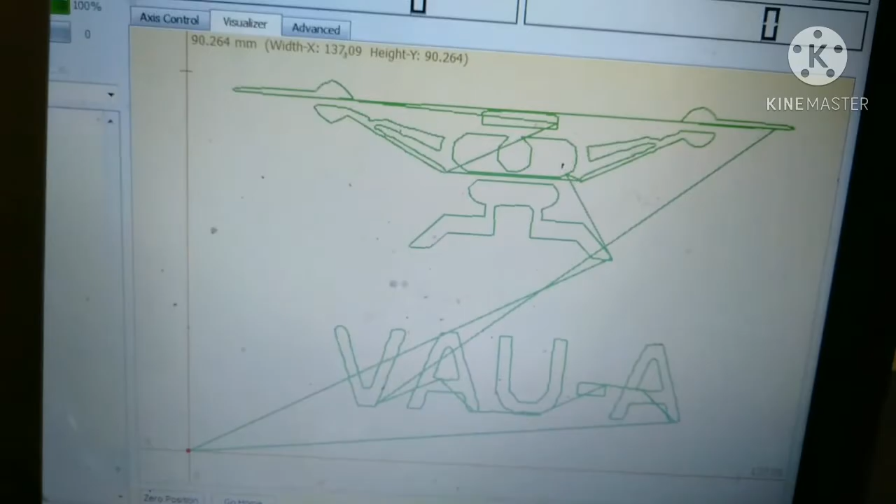Today I try to learn to use my mini 3018 CNC. I learn how to engrave, using this machine as an engraving machine. The first thing you have to understand about engraving: you need to use the engraving bit like this for engraving.

It makes a mark on your workpiece, something like this. So what I have done before, I broke my tool a lot because we used the wrong tool with the wrong material. So for this topic, to do engraving I have to use this bit. So this is the right tool for engraving.

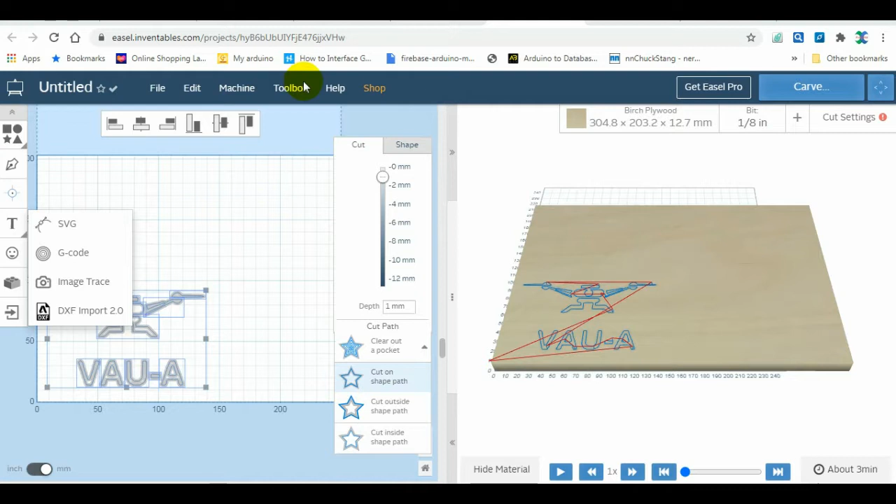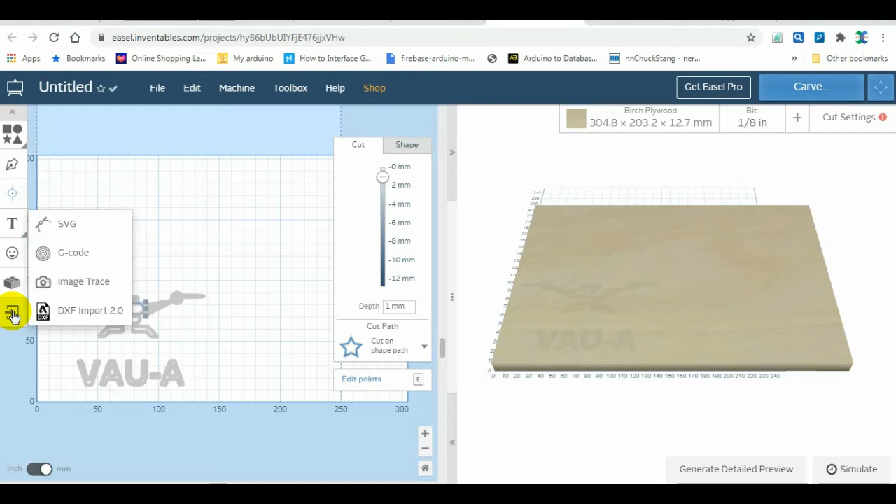I have to prepare the software. I have to prepare the picture that I want to engrave. The next step, I have to import. Use this tool to import. And then I import image trace, wait a little bit, and we upload the picture. And then you go select your picture. You have to understand the picture.

It should be like a line or vector picture, something like this, not too complicated. You need an easy picture. This is my original picture, and you can use this tool, you can take a look at the result after you set threshold and smoothing. You can make smoothing so your line looks smooth, and invert. This is invert and outline.

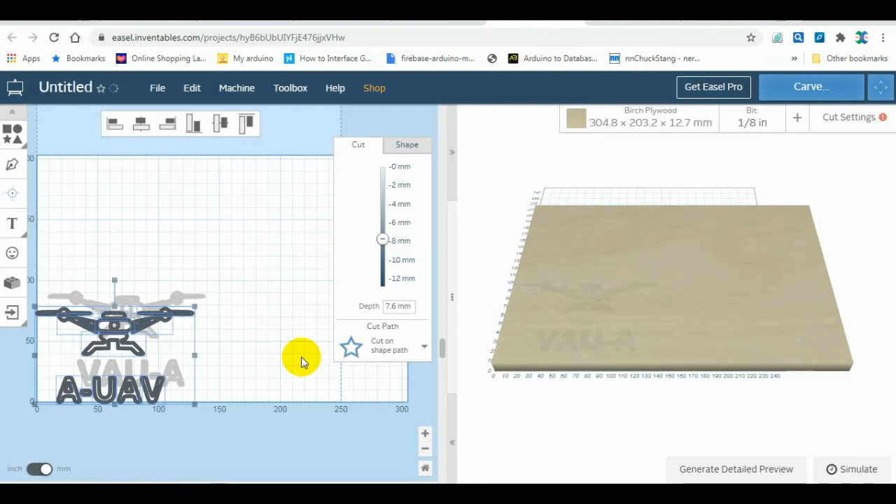Yes, something like this. You have to understand your engraving cuts in the black color. That means if you do like this, your engraving tool has to cut all the black color. It will take a whole day or a couple days. So what I want to do is like this. Then I click import. Okay, I have another one from before.

After you have this picture, the next step, you have to know how deep you want to cut down, and my depth is 1 millimeter. I have to cut down 1 millimeter. You have to think about your workpiece, please think about how thin it is. Now I like to cut down just 1 millimeter.

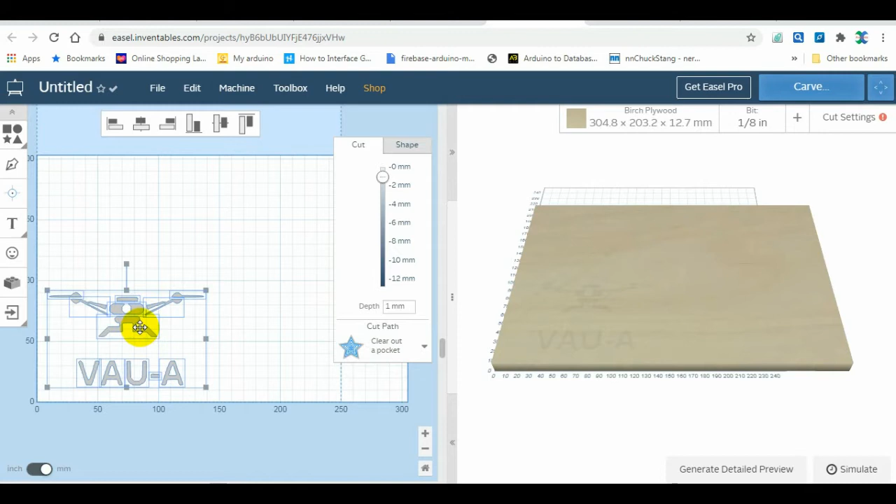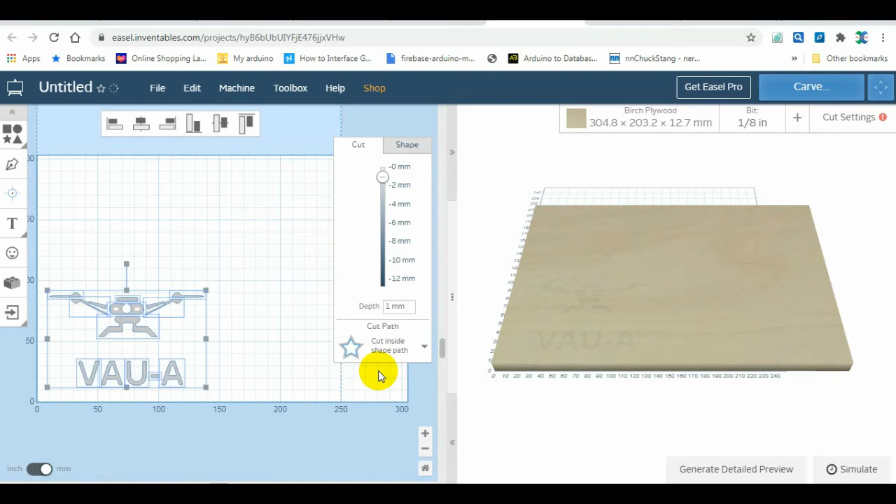And for this cut path you have to know what is going to happen with your job if you click here. This will cut in the gray, and if you select here, you cut in the gray of your job. You can think of the gray as the area that your tool will cut. This is cut inside the shape path. Yeah, this is the view. You can check the result here, the simulator here, you can take a look.

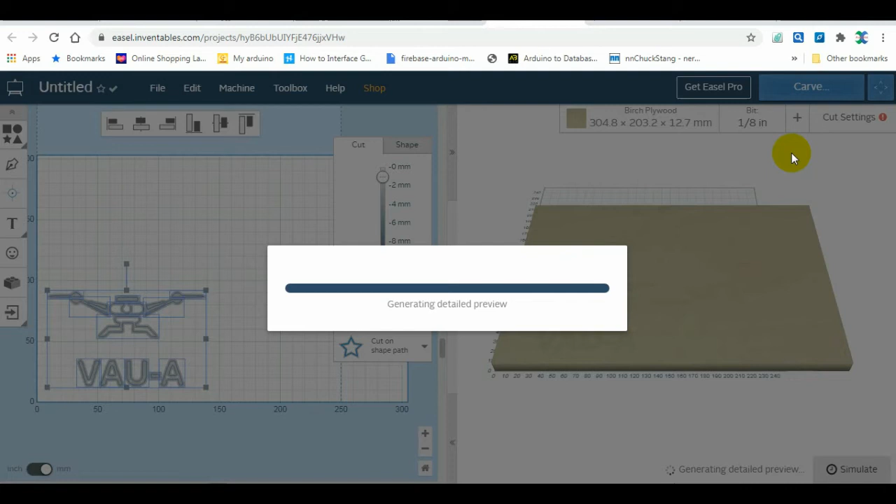Yeah, you can click the simulator and you can check how the machine works, and you can simulate, or you can move it manually by hand. You can see the result of what the machine is going to do. This job will take about 3 minutes.

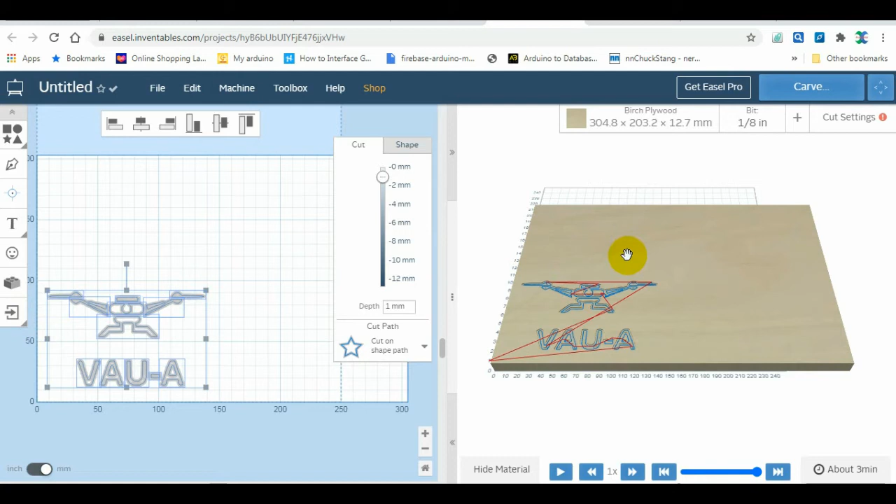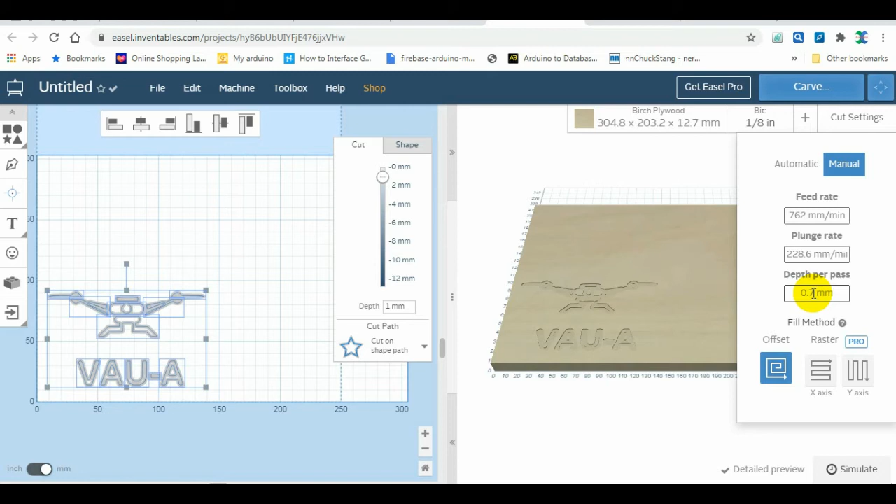So don't forget to make sure of your work area here. It says my machine is 300 by 200, but my machine is just 180, so you have to make sure your job is not over the 300 by 180 work area. Cutting, this is also important. You have to check here, per pass for the machine. Every pass should not be over 0.7 millimeter down. Make sure you do not overload your machine.

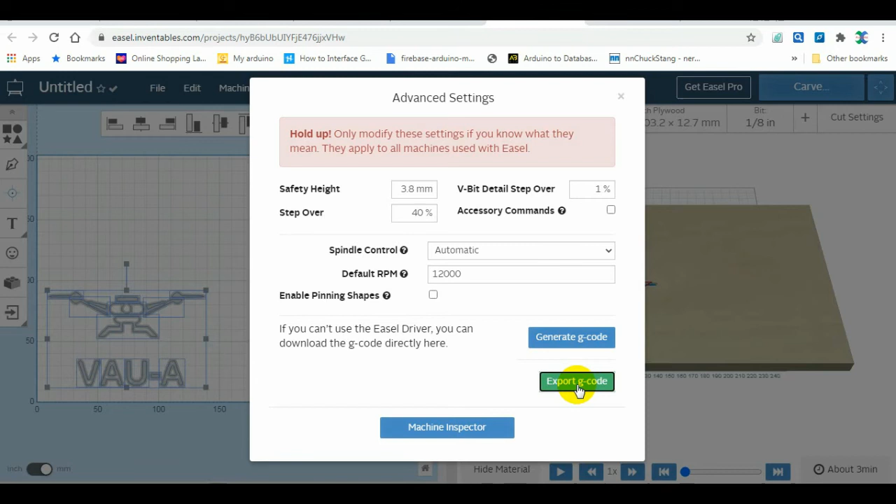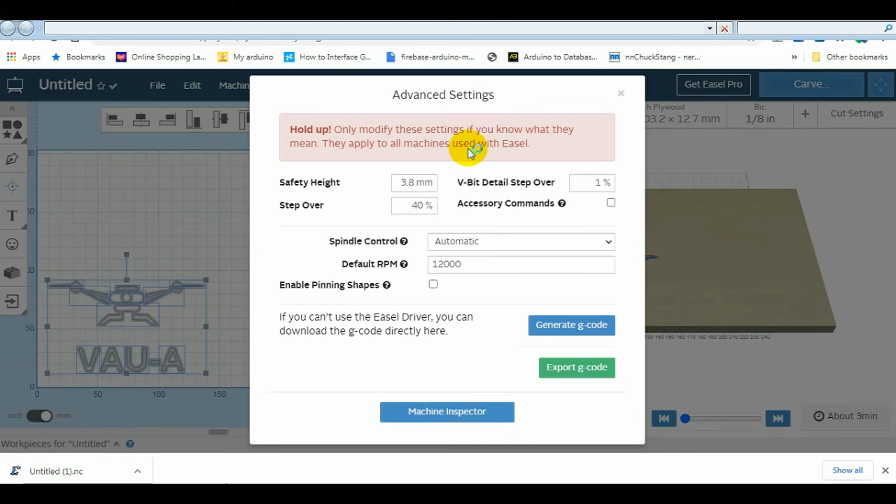So next, you go to the machine and go to advanced here, advanced, generate G code, and export G code here. When you are done, your program will show on the left-hand side here, like download, and I will bring this G code file to run in the next step. This is my program. Okay, now I have the G code program.

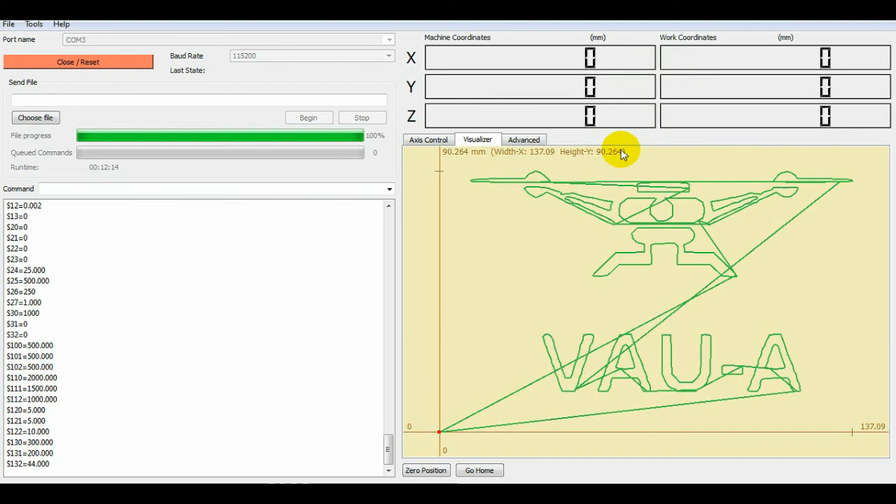After we get the G code file, we connect the program with the machine, and then we choose file and select the file to run the machine. You will see the machine here. This visualization is the G code that you send to the machine to cut. You get the job like this.

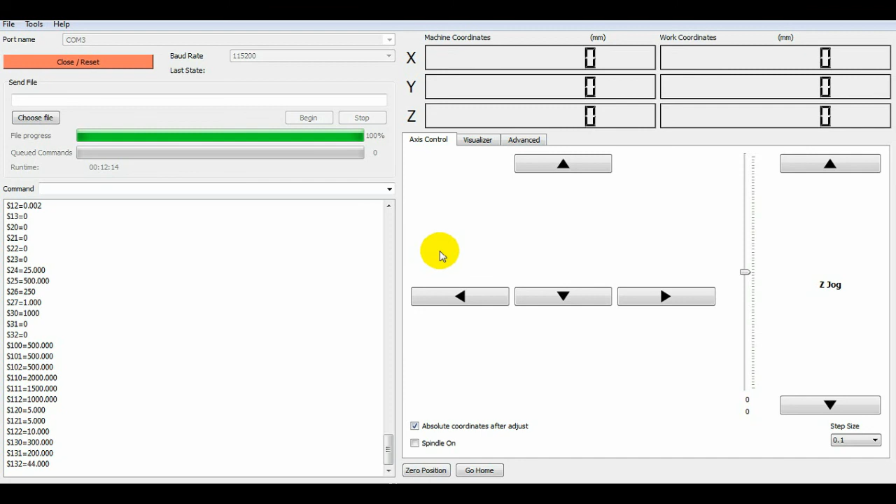For this machine, first of all, you have to set the 0 position. For the 0 position, I have a previous video. You can check it before you run the machine. Make sure you set the position in the corner, make sure it will be your corner like this. So I think today I have finished the video for the engraving machine.